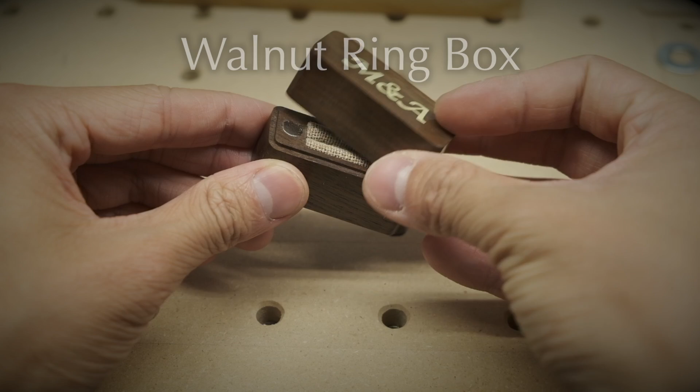Hello guys, Winston here. Just when I thought I was out of stock, they pull me back in. My friend Manthan told me he was planning on getting engaged, and he asked me if I could make him a ring box. And despite having sworn off making sellable things like this, I couldn't turn a bro away. So here I am revisiting an old project, which I guess I'm okay with because that means I can put a new twist on things.

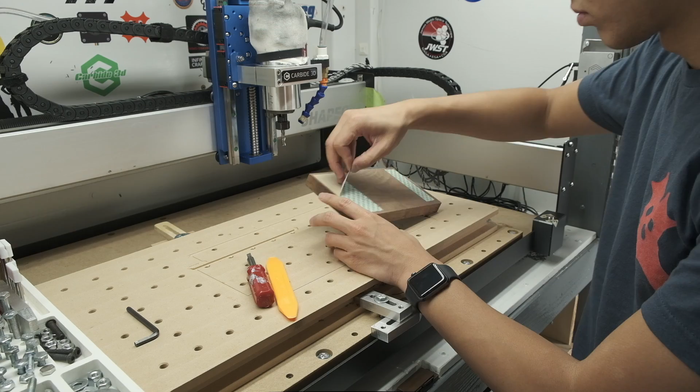For those of you who need a refresher, about 2 years ago, my old roommate wanted to propose to his now wife on a road trip and needed a slim ring box, so I machined one out of some sort of mahogany lookalike, sold a few on Etsy, and called it a day. It was a decent design that was simple, clean, and easy to machine, though it required a couple tool changes.

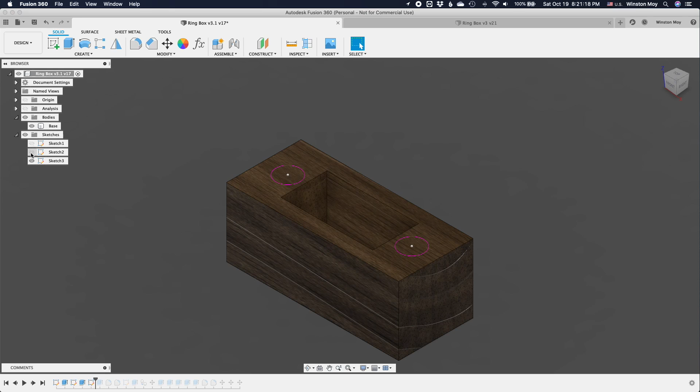This time around though, I wanted it to be a one-cycle start wonder. No tool changes, just a single setup and no machine tending. So that required modifying my ring box design and improving a couple things. The most important thing to do was to increase the radius of the corners so that they could be comfortably machined with an 1/8 inch end mill. Those corners should be noticeably larger than the radius of the end mill cutting it, not just barely larger. I usually try to oversize them by at least 20%.

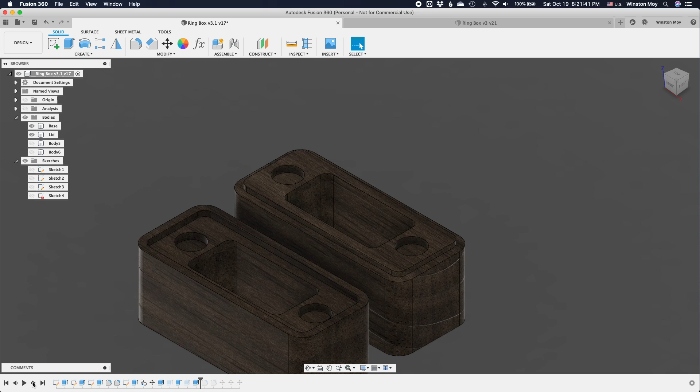I also wanted to recess my magnets a couple thou deeper to guarantee that they were fully seated in their pockets. A number of factors like sanding after machining or glue pooling up underneath the magnets when I install them would all end up pushing the magnet to sit slightly proud, so a 70 or 75 thou pocket would ensure that my 16th inch thick magnets wouldn't be sticking out.

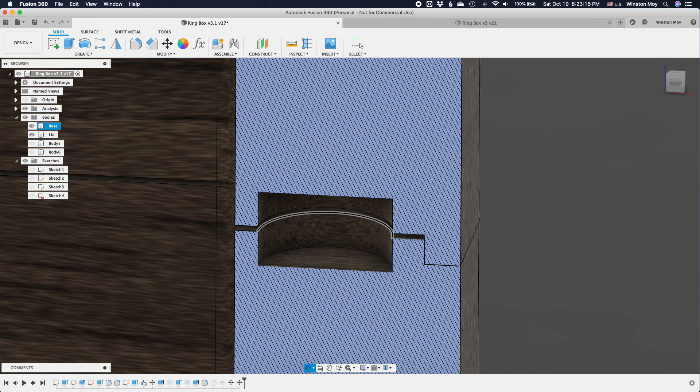Between recessing the magnets and extending the lip around my lid, I could force a small air gap between the magnets and tune the force required to pry the box open. Magnetic attraction decreases exponentially with distance, so that tiny gap will cause a slight reduction in how well the box halves stick together, which was a bit stronger than it needed to be. That makes the act of revealing the ring inside just a little bit smoother.

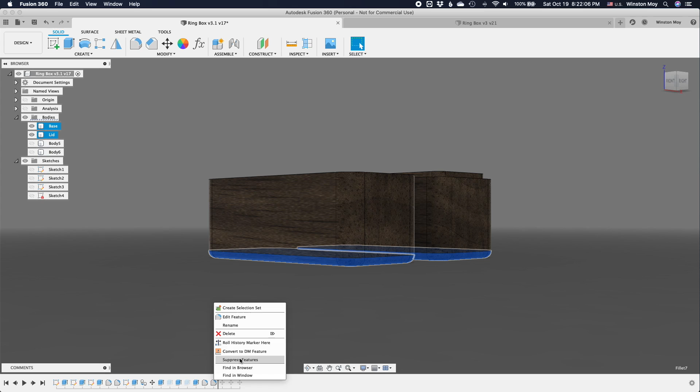I decided not to add a fillet around the top and bottom edges. This serves three purposes. 1, it means the ring box will sit more stably on a flat surface. 2, it means the ring box definitely won't be mistaken for a case of AirPods when you reach into your pocket. And 3, it means I don't need to round over the top edge either manually or on the CNC. That saves me time and effort. But obviously, my primary motivation for this design change was noble and had nothing at all to do with my laziness. That basically wrapped up my CAD tweaks.

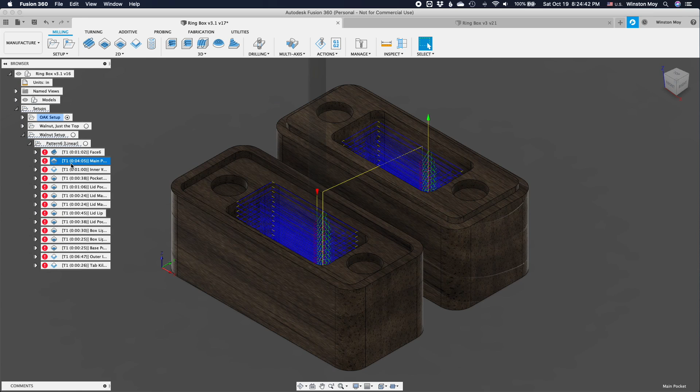On the CAM side, the machining process really didn't change much at all except for changing all my tools to 1/8 inch. The order of operations was more or less identical to my first ring boxes: face the material down to an exact thickness, pocket out the main cavity, add details, and then cut around the outside. On the Shapeoko, I taped down a slab of 3/4 inch walnut, zeroed off the wasteboard, and started machining.

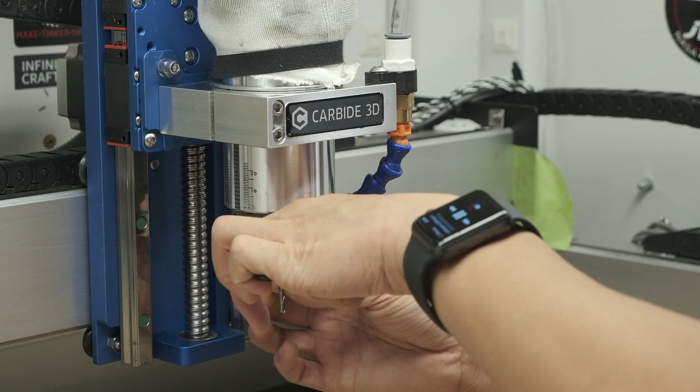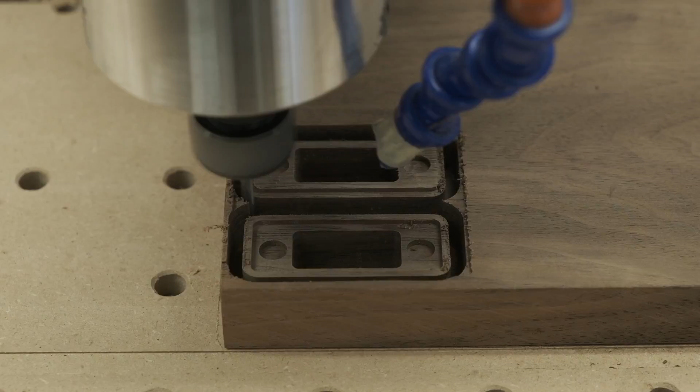Because I was machining both the base and the lid simultaneously, there was no way for me to gauge the fit of the two halves until they had been liberated from the stock. The lid was a little tight, so I made another set with an extra 3 thou of margin around that interface.

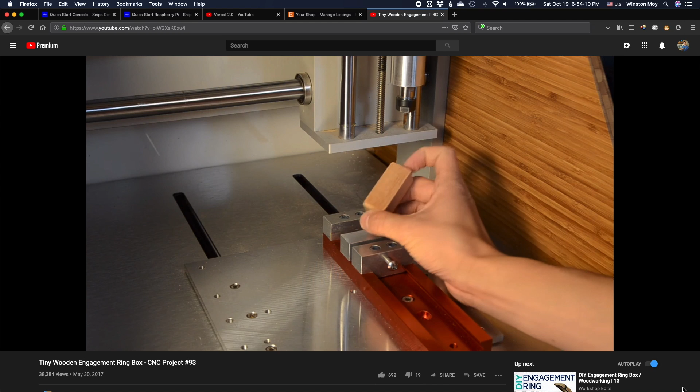Now, on my original ring boxes, I had engraved the couple's initials on the lid and then filled the letters with paint. My friend inquired about gold paint as opposed to black or white, and while I could have obliged, I just don't think that gold looks good in paint form. However, you know what does have a proper hue and looks classy as hell when paired with walnut? Brass. So I elected to inlay the initials in brass, which meant breaking out some really tiny end mills.

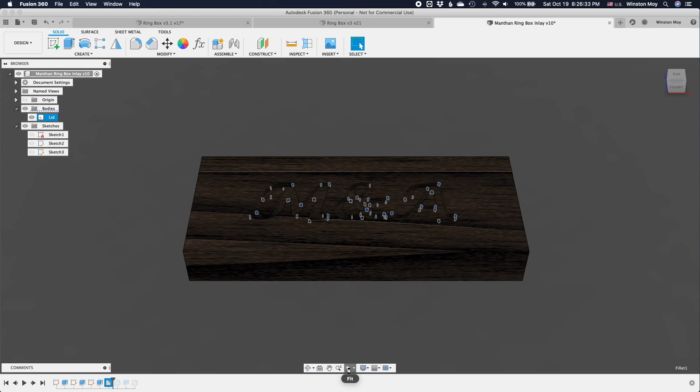The inlay pieces were modeled by first laying out some text, extruding them out to a thickness of 0.5 millimeter, and then carefully filleting or rounding over all the corners. I would have to cut both the inside and outside of the shape to match so that there couldn't be any sharp angles.

Also, note here that for the inlay pieces, I'm doing the A in a separate setup from the M and ampersand. There's not enough room for an end mill to pass between the ampersand and the A, and I don't want to put a space in there because I'm also using this model to pocket out the walnut to receive the brass, and the spacing needs to be correct.

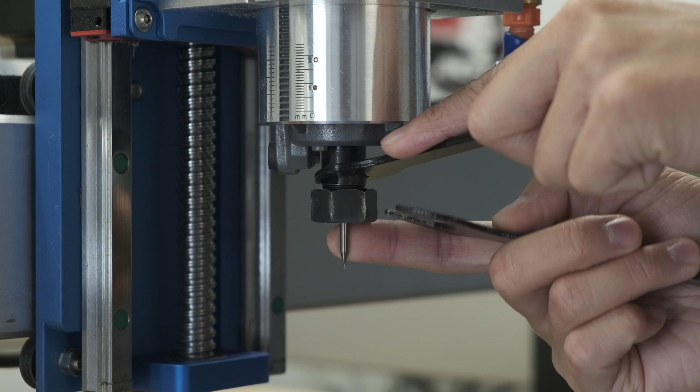I loaded up this 15 thou end mill, which you would have seen before if you're subscribed to the Carbide 3D channel, and let it loose on some brass that I had faced down to a known height. And did you catch that? The tip of the tool broke off almost immediately. I was kind of expecting this because of the runout of the router.

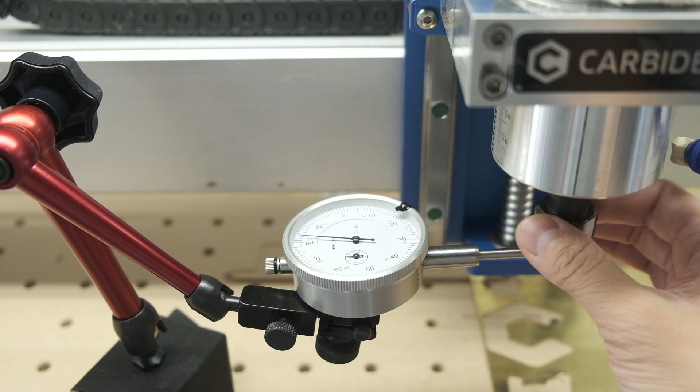Even on their best days, most palm routers don't get less than about 1.5 thou, maybe 1 thou of runout. In my book, anything more than about 5% of the diameter of the tool in runout is a recipe for disaster. So 1/32 of an inch, maybe 25 thou if your router is exceptionally straight, is the smallest tool I can recommend on a conventionally equipped Shapeoko.

Having run into the limits of what I could machine on the Shapeoko, I brought my brass and walnut to work so I could bring the Nomad to bear on this problem. I was being super conservative with this end mill since I only had 2 left, and every mistake costs $15: 10,000 RPM, 5 inch per minute feed rates, 4 thou or 0.1 millimeter step down.

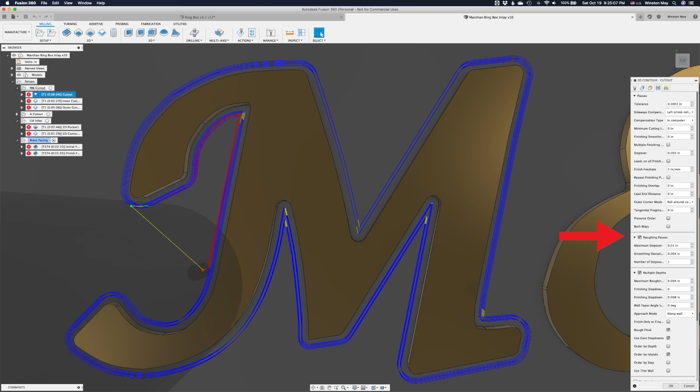I'm doing this with a roughing pass enabled, so at every step down I'm taking a pass leaving 3 thou of stock to leave, and then immediately doing a finishing pass afterwards. I want to finish as I go because there's so little surface area on these letters that they're going to be very delicately attached to my table once I break through the bottom of the brass stock. This ended up working out way better on the Nomad than the Shapeoko.

I deliberately cut the brass letters first so I could test fit them into the lid and tweak my stock to leave for a snug fit. It didn't take much, about -1 thou stock to leave got it so I could easily inlay the brass without leaving any visible seams. I brought the pieces home so I could glue the inlays with CA glue, sand everything flush, and then immediately lacquer the ring box while the brass was still shiny.

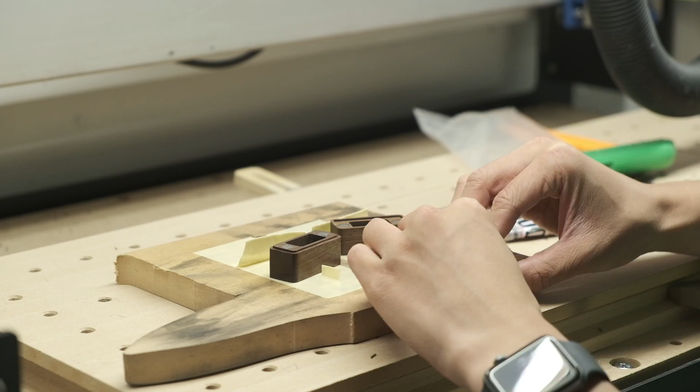With the walnut sealed, I then moved on to installing the magnets and the ring retention mechanism. Is there a technical term for this thing? Whatever. The slit where you shove a ring. I like to use a soft canvas-like ribbon that I bought from a craft store, folded in such a way that I don't need to do any sewing. Squirt some of your preferred adhesive into the ring hole, insert the fabric plug, and let it sit overnight.

If you're using E6000 like I am, I highly recommend letting it sit for at least 48 hours before using, unless your significant other likes the smell of organic solvents, which, I mean, you can't rule that out. My ex, for one, seemed to be confoundingly immune to the smell of nail polish remover. Anyhow, give E6000 the full cure time and you'll be good to go.

And just like that, you're done. Really, nothing new here except for the integration of the brass inlay. But I think the finished piece looks pretty darn cool for it. The level of detail and seamless integration of the brass inlay is just really satisfying.